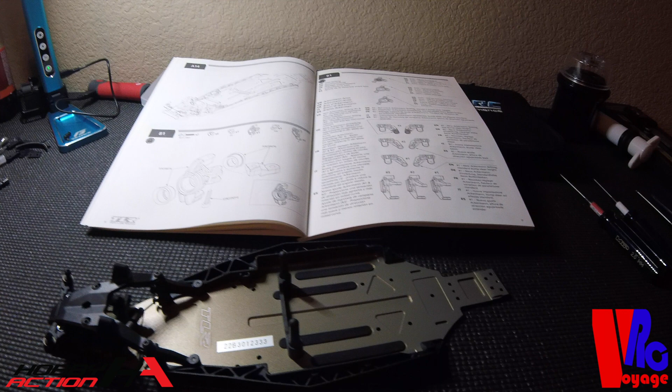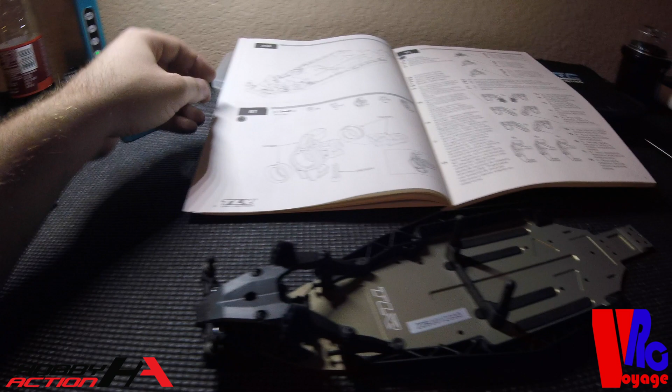Build's going really smoothly. Everything's following along with the manual very well as far as the bags and everything go. They actually label the bags like A1, A2, all the way through. I think I got like A5. As far as the build goes, there's actually 13 steps in the build, so it's not A1 goes to bag A1, but you are following along. As soon as you need more parts, you go from bag A1 to A2. So it follows along really well.

All the machining and molding of all the parts so far seems very well done. Haven't had any screws or anything strip out. I am using my DeWalt hand drill, got the clutch set all the way up to 15, which means getting the screws in there nice and tight and not stripping out the plastic. So quality of the materials and everything so far is really good.

I'm going to continue on and do all of the steps for bag B.

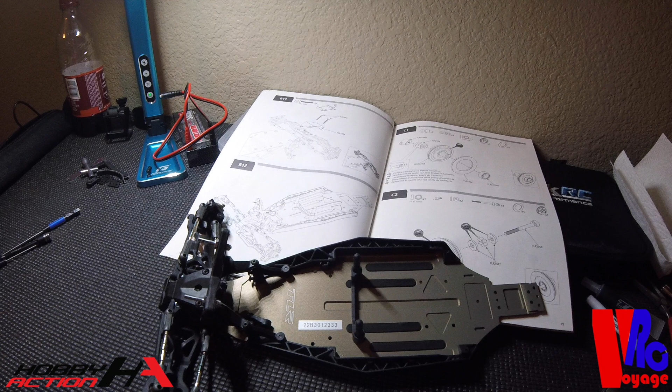Alright guys, just got done with bag B. Build's still going really well. You can see it was more of the front end parts, suspension parts, turnbuckles, front end, got the axles in there. Everything's still going together smoothly.

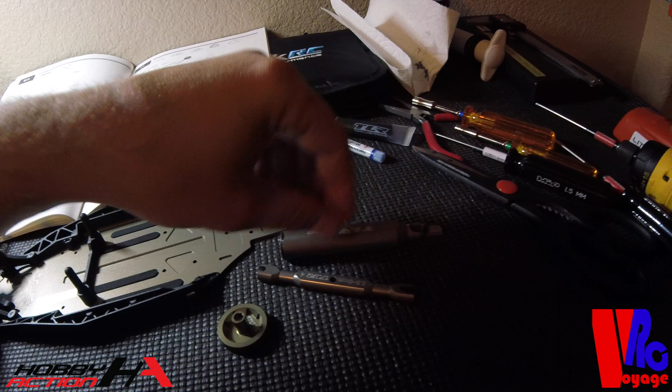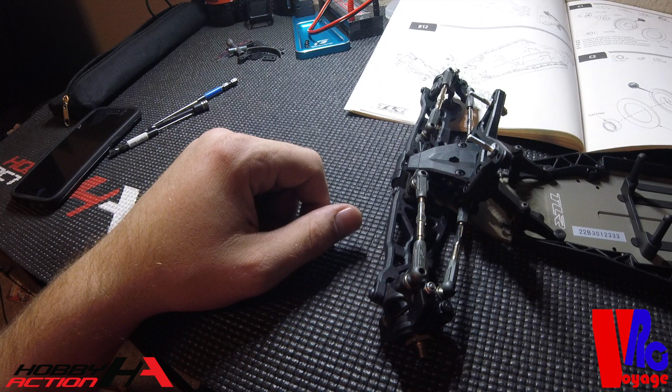It is handy at this point to have some of the TLR tools if you are able. Makes building the turnbuckles easier, and then also their slipper tool, which is a 5.0 nut driver basically, is going to help putting the front end together. Also handy to have a drill with a chuck on it for building turnbuckles. You can really work the turnbuckles in and out of the rod ends, just work them in to make it easier to adjust down the road. That way you're not adjusting it and they're so tight that they pop off the ball studs.

Also in the manual they suggest, and what I've always done, is put some black grease in there. Again, will help adjustability down the road. But build's going good. I do like that they include the adjustable, or the quick tune, shock mounts. You don't have to take the shocks off, you can just undo the mount from the backside, flip it to whatever hole you want. Makes it easy. So on to bag C.

Done with bag C. As you can see, that was basically building the transmission. Built the ball diff, direct drive system, the whole transmission. Everything went together really well. Build's just going great so far. Everything's doing what it's supposed to, everything fits properly, all the parts are machined properly.

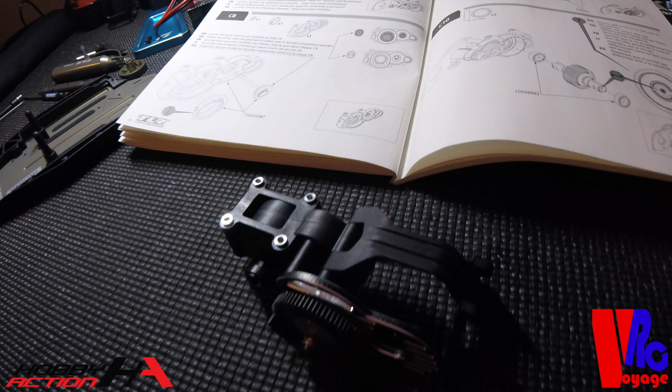Ball diff went together really well, very easy to put together. I did notice, and I don't know if this was just mine, but on the tube of silicone diff grease they give you, this is a really thick grease, so I actually had to cut the tip off. There's already a hole in it, but I ended up cutting a little bit off just to get it out easier. It's really hard to get out because it's a really thick grease.

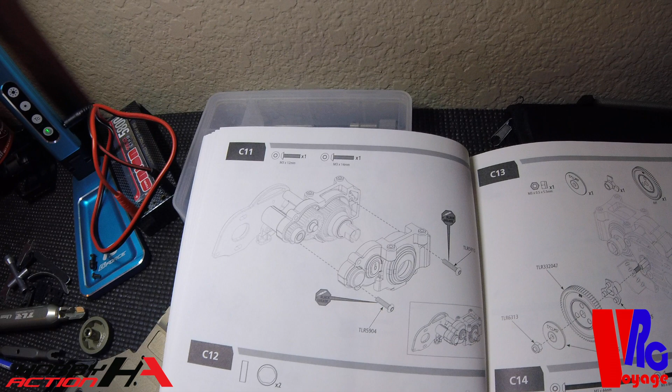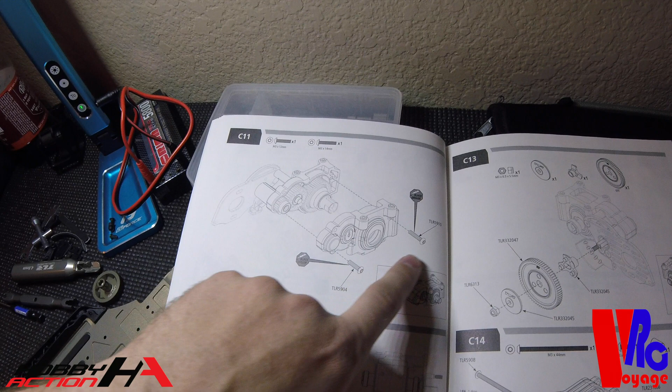Everything's going well, but a few things about the manual. On step C11, it's using two different size screws, M3x12 and M3x14. However, when you go down to use them, they give you part numbers, TLR 5904 and TLR 5910, which are nowhere noted up here. So it almost leaves you looking at the picture saying, oh, that one looks a little longer, so that must be the 14mil and not the 12mil. Just little details that were left out in the manual.

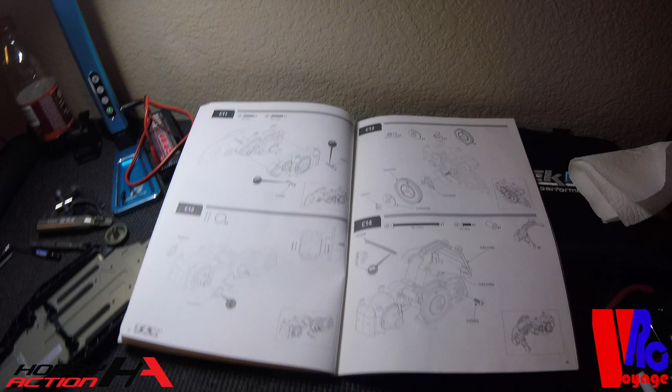Other than that, build's going good. Transmission is very smooth, went together very well. Ball diff went together very well. That direct drive system on there works really well.

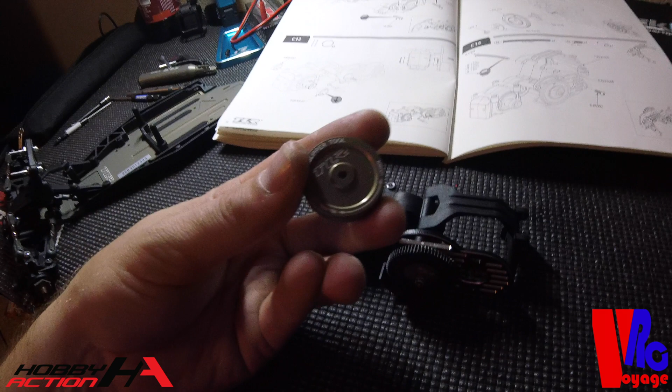Like I mentioned before, the 5.0 slipper tool that TLR has, I guess only works on their slipper clutch, because they're using a 5.5 on the direct drive system. So not needed, but you're not making adjustments, so you don't need it anyway.

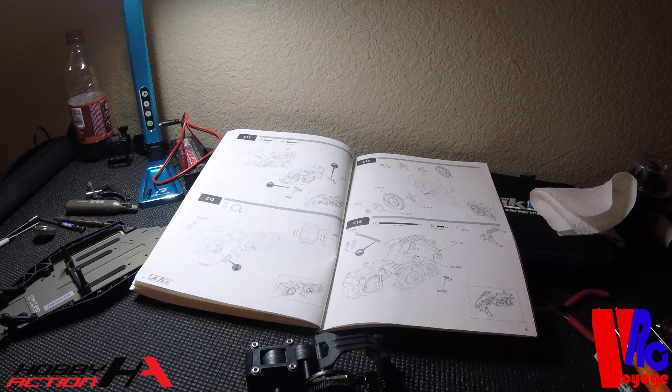Anyways, on to bag D. Finished up that D-bag. I don't know why I always have to say that one weird. It's bag D, you gotta call it a D-bag.

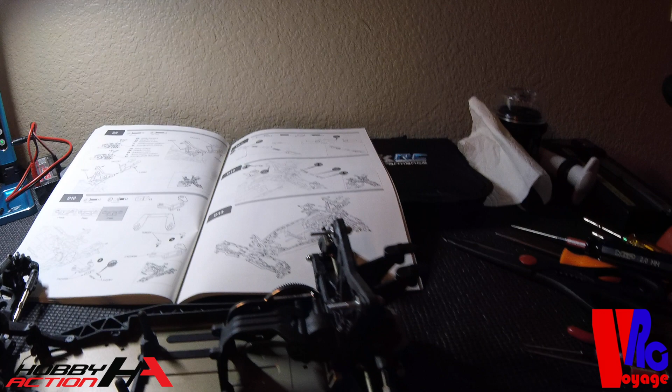Transmission is in, rear suspension is done except for shocks. Like I've been saying this whole time, everything's going together well, easy assembly. Got those nice lightweight rear drive shafts in there.

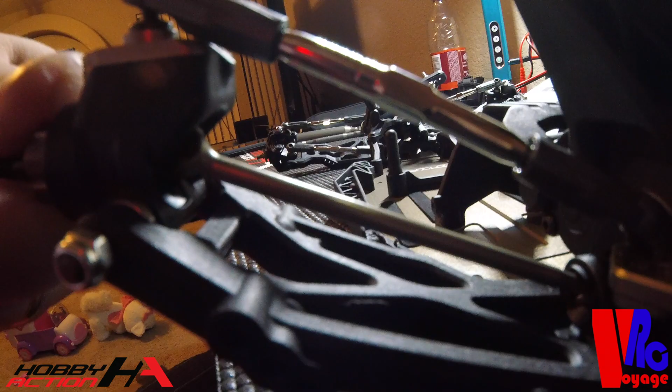Do want to make sure you use Loctite when you're putting the CVs together, because it's not captured, so if that set screw does back out, you will lose it and your CV will fall apart. Never want that to happen.

Other thing to keep in mind is when you're doing the hexes, those little screws you're clamping them down with, make sure you don't over torque them. It is a small screw, so that head can snap off, and then it's just causing you a giant nightmare trying to either get that one out or just buying new hexes and putting them on.

The other thing I'm liking about this kit is they added these aluminum plates on the rear hubs to help strengthen them. I think that was a very good idea, just added durability and ups the bling factor a little bit. So anyways, bag D went together really well.

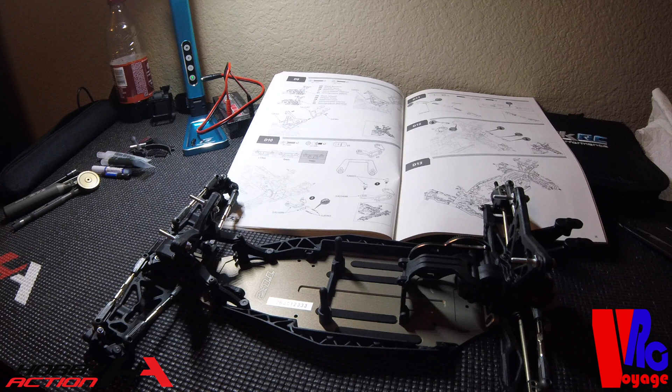Next up, shocks. One more quick thing about bag D. I don't know why TLR still does this, but there are two screws in this kit that use an 050 standard driver. For reference, it's the M2 by 6 millimeter. They are tiny little guys, here and here. Don't know why TLR hasn't opted to just make the head of that screw accept a 1.5mil. It's just rather annoying that the whole car is metric except for those two screws.

Anyways, that's my one major gripe with the kit so far. So, step D5, bag D, two screws with an 050 head. Annoying.

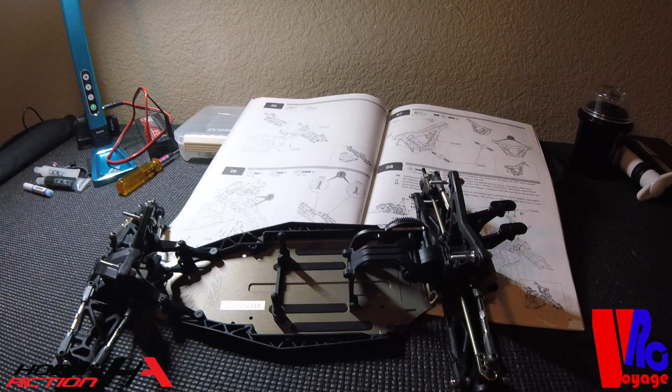Alright guys, about to do the shocks here. Just wanted to take a quick second to show you the quality of the parts we're dealing with. Obviously nice machined bodies, and then actually aluminum machined caps. One of the very few times you see that in a kit.

Some guys often wonder why TLR cars are a little bit more expensive than some of the other cars out there. Answer being quality of the parts that you're getting. Really don't see this nice machining and these sort of upgrades included in the kit in some of the other cars. Not to mention all the other machined hop-ups you're getting in the kit, not just the shock parts. Overall quality of the parts is kind of why you're paying a little bit more for the kit, but you're getting a lot more car in the kit. So yeah, shocks up next.

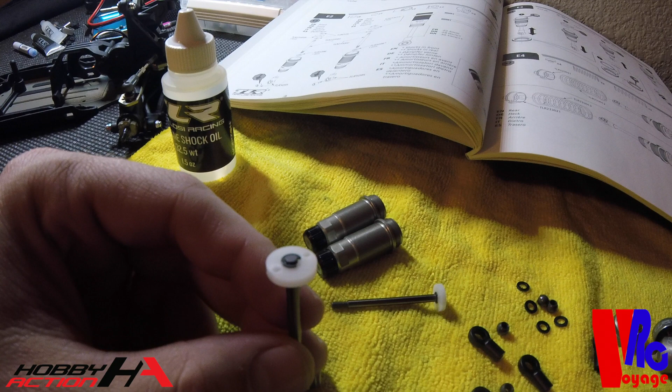Even though TLR shocks are pretty much at the top of my list for favorite to build and favorite shock, the only real downside to them is that they still use E-clips to hold the pistons on the shock shafts.

It's just more annoying than anything. With the machined pistons and the way they have the tolerances on these things, there's literally no slop on there at all. So it's just the annoying factor of having to use those annoying little clips more than anything.

Finished up bag E, which was the shocks. TLR shocks build really well, very easy to bleed. Does help if you have the Tamiya air remover, helps get all the air and stuff out of the oil. That way when you build them and bleed them, virtually no air in the shock, which is what you want.

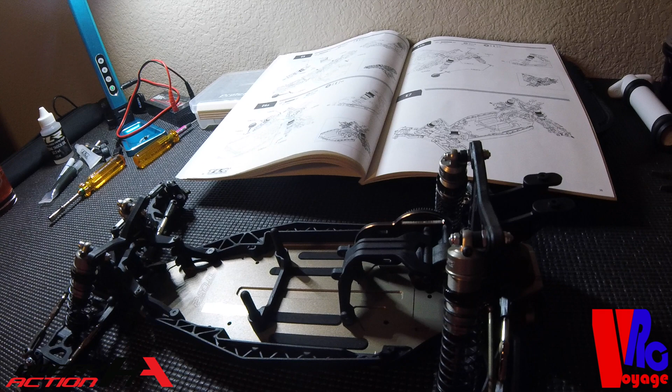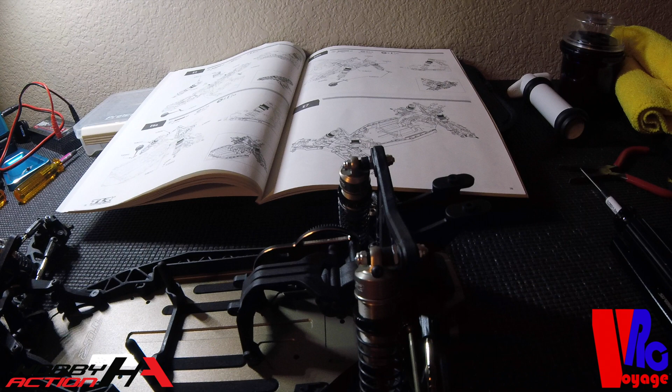They mount up very nice. Again, have those quick change kind of upper position mounting. Only thing I thought maybe could use would be a washer right behind the lock nut on the top side. Obviously the shock's not going to come off, but I feel like it'd give a little bit extra support, a little added security up there. But other than that, they built really well, they mount really well.

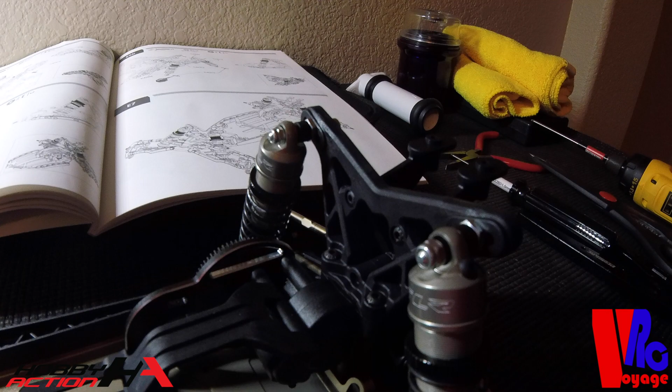The stock position out of the kit - they tell you to mount in the center on the rear uppers, center on the rear lowers, and then the front uppers are going to be the inboard, as well as the centers on the lower for the front.

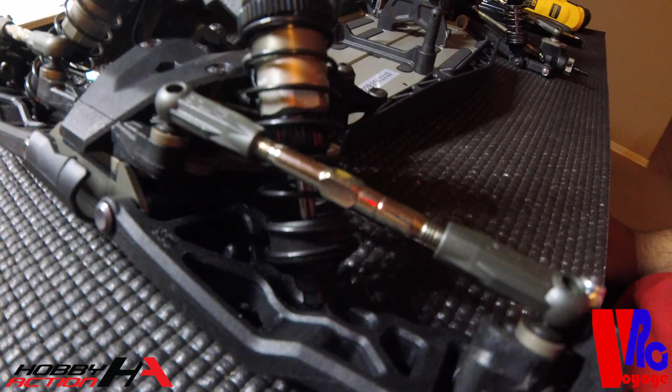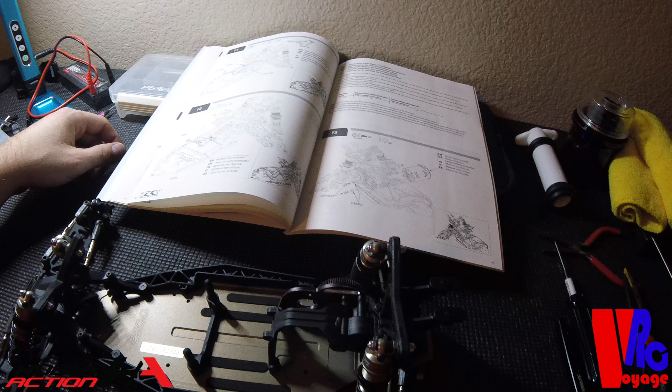Car's mostly built, got the shocks and everything, starting to look like a real car. Just one more bag and then we'll be ready for electronics. Going to open up bag F, which I think is just mainly the battery brace, and probably got the motor mount screws and that kind of hardware in there. So just going to get that battery brace on, finish it up, and go from there.

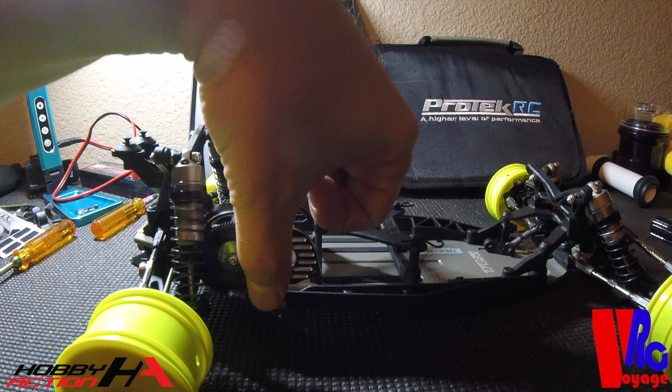Alright guys, got the build finished. Just finished up the last few things in bag F, which was the battery brace, wing mount buttons and shim. Obviously the body needs to be painted and the wing needs to be mounted. It does come with adhesive backed Velcro to mount the body with. Then you can use a body clip on the front, which I didn't install.

Mounted the wheels up. Obviously you need tires and electronics, and that's all that's left. So this is ready to hand off to novice Nick.

Nick, you better start throwing down some decent lap times. The car's there. Where's your driving at?

But yeah, build went really smoothly.

Only a few complaints would be having those two screws that use an 0.050 hex driver. It's kind of, why not just make them a 1.5 head to use a 1.5, that way you can use all metric tools.

And then the E-clips on the shock pistons, which really isn't a big deal because they're machined so well that the tolerances and everything, there's no slop on the shaft. Yeah, I said it.

Other than that, everything went smooth. The only thing I did have a little issue with was mounting the inner hinge pins on the front bulkhead. One of the sides was a little tight, so having an arm reamer would have came in really handy, just to clear out any debris or anything from the mold that got in there causing that.